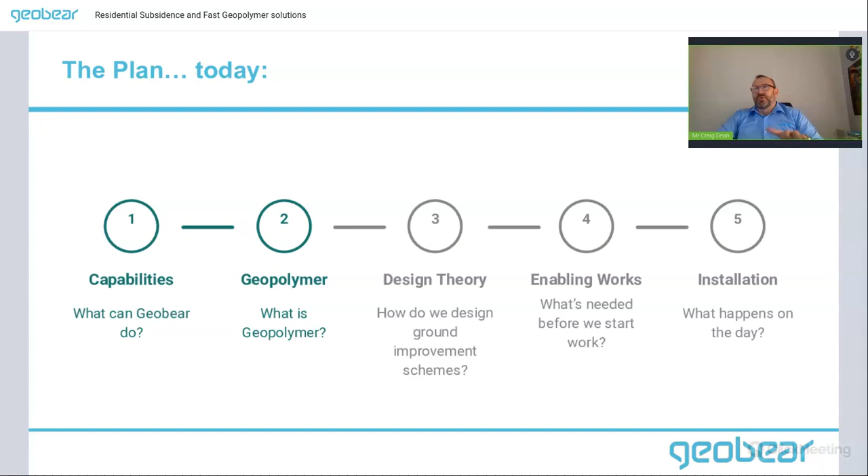So a little bit of understanding who GeoBear are. So we're a global leader in non-destructive solutions for foundation and infrastructure settlement, with a pattern of obviously subsidence problems. We're a global business established in 1983 in Finland, and I will go into a little bit more detail regarding that in a second. We were formerly known as Uretek up until December 2017.

So Uretek originated from a franchise model. Primarily, what we decided here at GeoBear in 2017 was to bring it back in-house. Primarily, that was to ensure level of service was acquired, and nonetheless, GeoBear was born in 2017. Since that was originally in the UK, we have primarily gone to other global areas, which again I'll go into in a second.

But we do have 3 depots and offices throughout the UK, and again I've talked about the importance of carbon footprint. But we operate from our offices and depots in Wolverhampton, Winchester, and Sandy. We're investing heavily in geographical locations moving forward to again offset and ensure our carbon footprint is achieved.

We operate with a full in-house engineering team. We also work with third-party consulting engineers. It depends on the detail of bespoke projects, and we're not going to hide that every project is individual, to understand and triage what the problem is, to then offset and ensure that we're finding the correct solution.

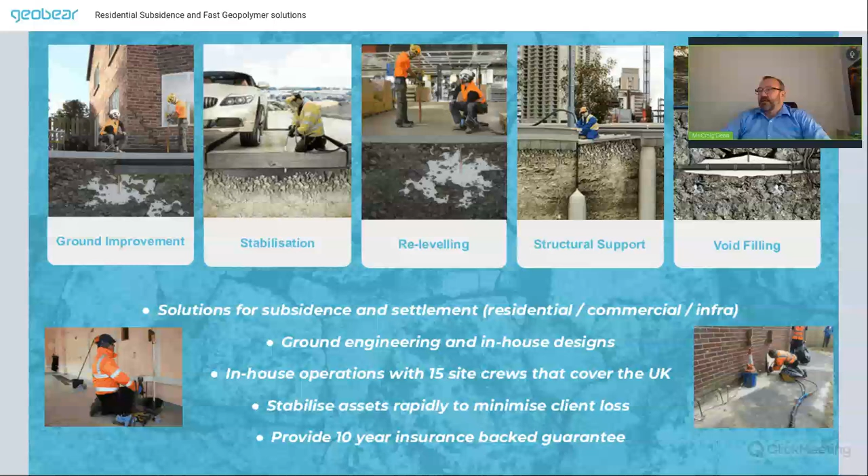So what I'd like to just quickly go over is the introduction of geopolymer materials. We have a volume of different geopolymers as market leader that react differently within different subsoils, from different techniques that we operate in, from ground stabilization to slab stabilization to ground improvement, and so on. Typically, our geopolymer is based on multi-component structural resin technology, which especially has been developed for ground engineering applications. Again, alternative ground improvements from piling to conventional underpinning.

So primarily the geopolymer is two components which hit each other and have a chemical reaction. It starts its early life as a liquid, and then very quickly it becomes a solid and solidifies with increased volume of dynamic energy, and it has an expansion force. I think it's important, and I will show you in a second a video where you'll see that it starts its life off as a liquid, starts to have a chemical reaction, and then the expansion force very quickly is clear. The chemical reaction is very quick, resulting in defined physical and mechanical characteristics.

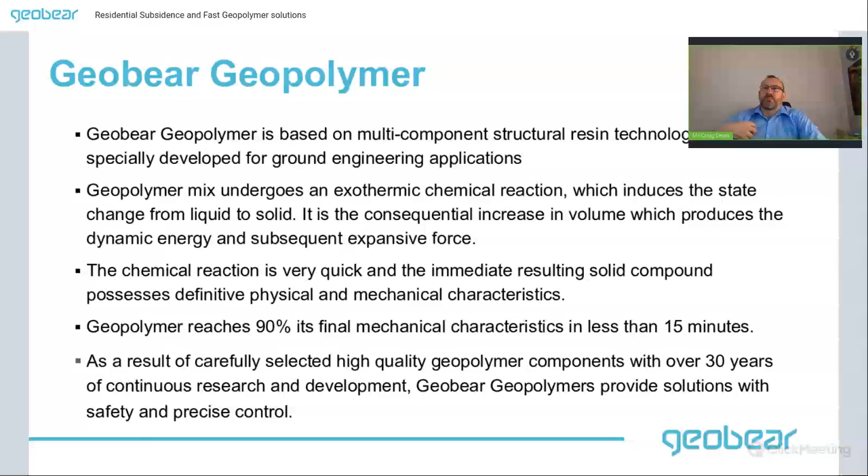The geopolymer reaches 90% of its final mechanical characteristics within less than 15 minutes. Once the geopolymer is entered into the ground, within 30 to 60 seconds, the reaction starts and primarily starts to expand. The carefully selected high-quality geopolymer components have over 30 years of research and development. And GeoBear continue to utilize our technology and provide a solution in safe environments with precise control. And I want to talk later on a little bit more of how that looks when we're actually treating a property.

So the specialist geopolymer ground injection expands 5 to 30 times its liquid state and volume. It strengthens weak soils and below structures. So there's no need for excavation. We start from ground level and inject below foundations, so to speak.

95% of the strength is achieved within 30 to 60 seconds from injection, and it is done in a controlled manner. We can lift foundations and slabs, multi-story properties, and I want to stress the importance that every single project is individual. It is a safer and greener process than alternatives. I'll go into our carbon footprint in a second, but primarily the two different components, automatically mixed on site, will then present an enhanced movement.

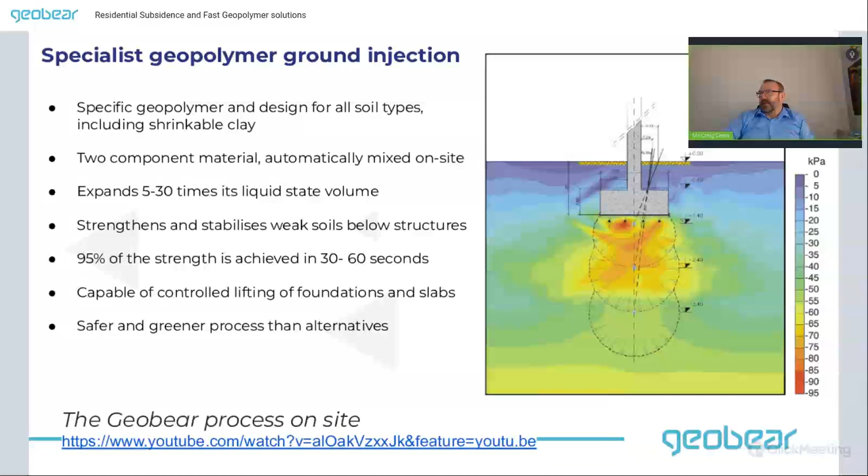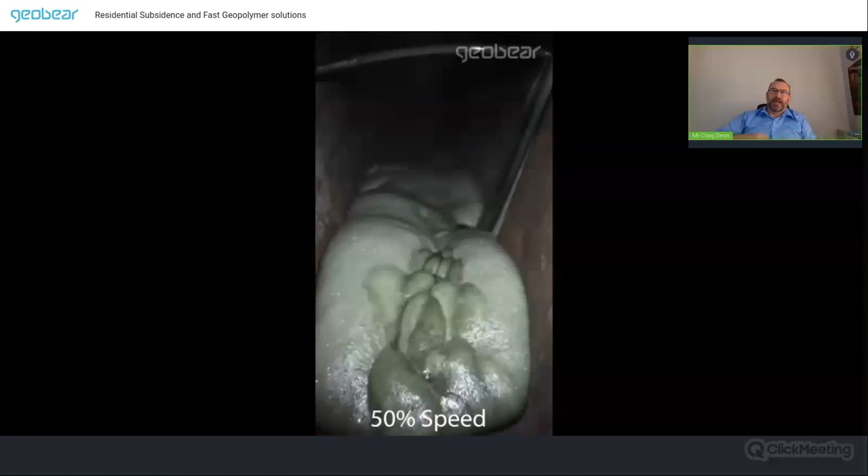So this is where I want to actually just show you, if I may, the process of how it starts its life. So Alistair, if you can just show the video, if you don't mind. So this is typically, it starts off as a liquid format. It very quickly has a chemical reaction, as you can see, and it starts to expand. Now, the differential within geopolymers and how our geopolymers work: we have significant different numbers of geopolymers, and they react differently within different subsoils. Thank you, Alistair, you can go back to the slide.

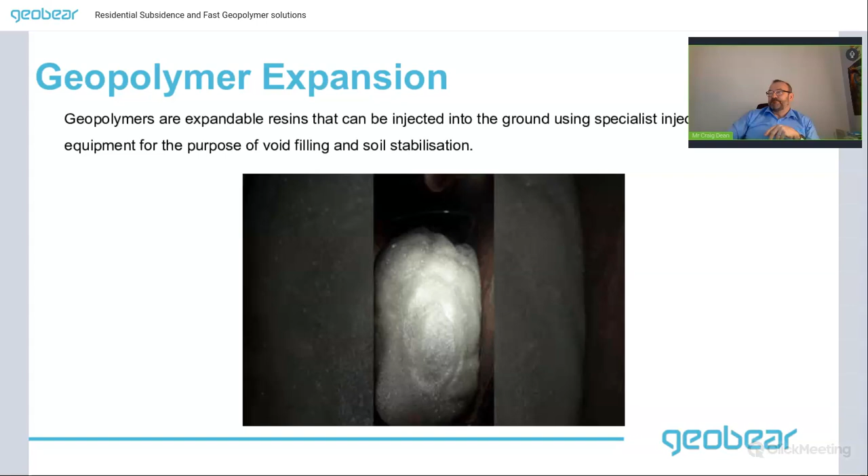Within that aspect, when we're going through our understanding of what is the main cause or the triage of subsidence, we will specifically, bespokely review the analytic data that we get to then present which geopolymer we want to have during treatment. And again, I'll touch on that slightly in a second.

The properties of the geopolymer: it's rapid hardening. It's 10 to 5 times lighter than your typical concrete or grout, respectively. Therefore, we're not adding more weight compression to the ground or the underside of foundations. It is a water-free solution, so geopolymers do not require water for their curing or hardening process. And as I've talked about the rapid hardening, within 15 minutes of injection it has cured and reached its hardened geopolymer property.

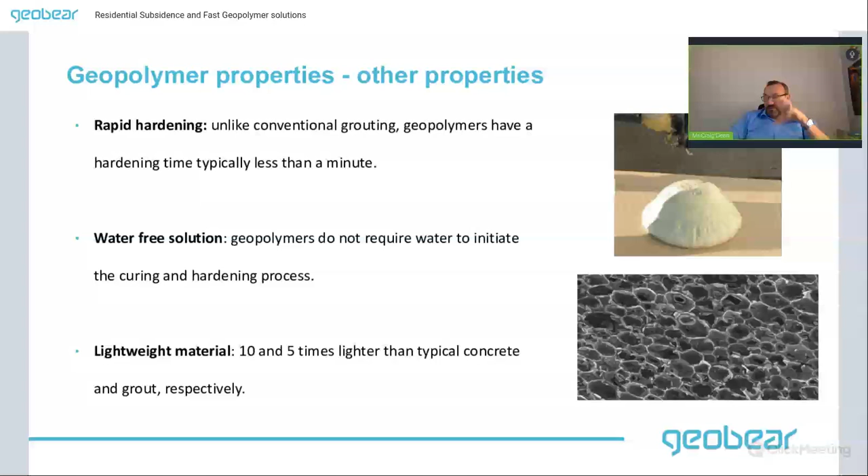What's very important to ourselves, and you've heard me talk about it throughout, is our carbon footprint. Carbon Footprint Limited undertook an independent assessment of our geopolymer injections, and it produces in the region of around 53 to 90% less carbon footprint compared to grouting or conventional mass concrete. Now, I can't be specific on the percentage because the geopolymers we have here at Geobear are different. So I'm trying to give you some form of scale, but 53 to 90%.

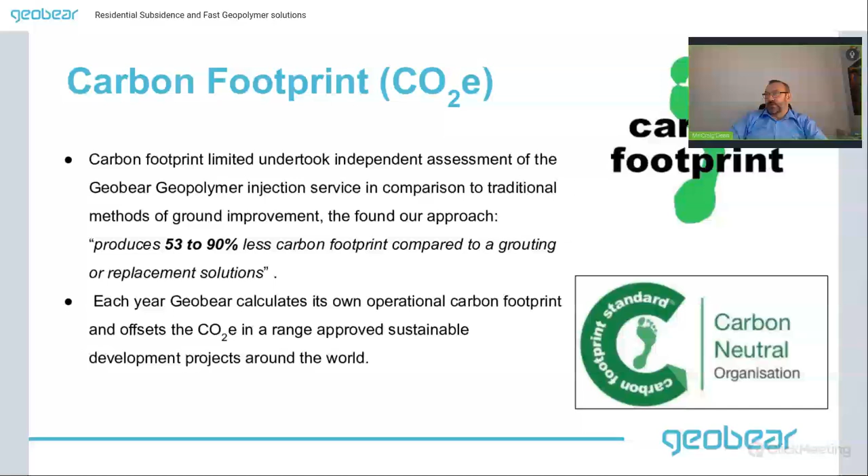Each year, Geobear calculates its own operational carbon footprint, and we offset that CO2 by way of approved sustainable development projects around the world. And we take great pride in that. And we are forever, like most reputable and good companies should be, looking at carbon footprint as a whole.

So, residential subsidence. I am going to go into detail of how our journey looks, but primarily what my guys who work for me are trained to look at are the signs of subsidence, working with multiple different organisations, from insurers to social housing companies to private residential clients. So we're looking at direction of cracks. We're looking for the categorization of cracks to follow a triage of solution. Door frames, windows that are sticking. We're looking also for settlement, historic movement, equally accelerated movement due to anything from drainage failure to anything that potentially is causing the root of subsidence.

During our site visits, we're looking not just at the specific area of concern. For example, a rear elevation outrigger is showing signs of movement, cracking. We're reviewing the whole property to understand what is required to give that level of expertise and service that we expect here at Geobear. Areas that we are looking for are separation, rotation of extensions, rippling within wallpaper, and level surveys are carried out to understand the scope of potential movement throughout the whole footprint of that property.

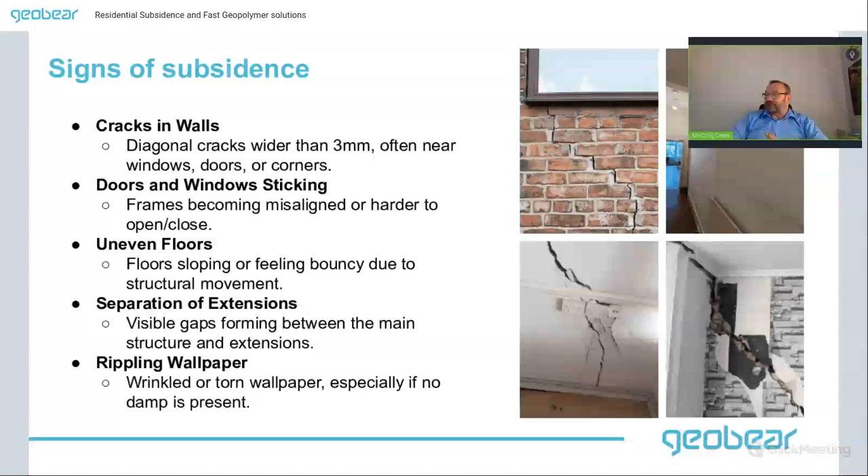Without boring you, what are the main causes of subsidence in the UK? Shrinkable clays. What we've seen in the last 7 years is what we call two surges, where we've had heat waves that have taken the moisture out of the subsoils and soils, and heave and shrinkable clays are becoming more and more prevalent within the UK. Tree root activity plays part of that as well, so nearby trees and vegetation extracting the moisture out of the ground. So during our site visits, we're looking not only at the footprint of the property, but the perimeter of the property, including understanding differentials within trees, from oaks to maples, to understand what we call low to high risk.

Water leaks in the UK. As we know, in the UK, a lot of properties were built in the early 1900s, 1930s, 1960s, and until a drain survey has been carried out, we're making an assumption that they will be potted drains that more than likely will have some form of defects. So we're very keen to equally understand location and condition of drainage. So water leaks is a prime example of what we deal with every day here at Geobear,

and what is causing the subsidence. Mining and historical excavations: again, bespokely, we'll review and underline the footprint of the property prior to the property being built. So again, we're looking at historic mappings to understand what potentially was there before the house was built, and then latterly construction work. So nearby digging, piling, disturbing soil stability, equally vibration, and so on and so forth. That is potentially the cause of subsidence.

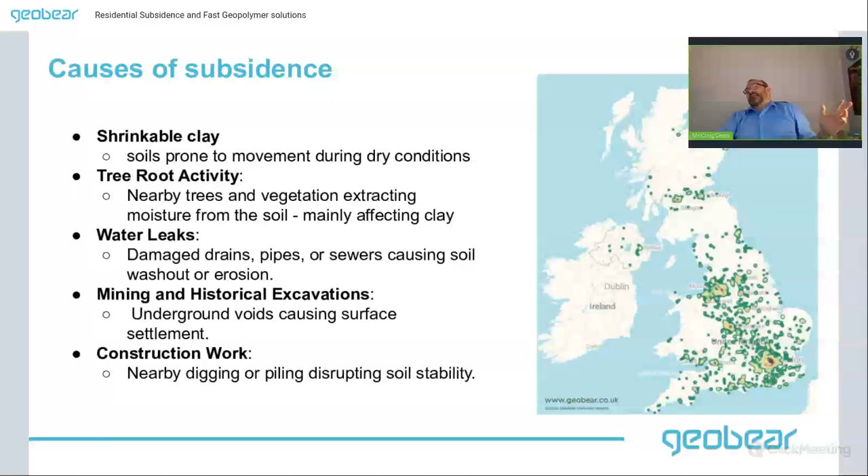So within that aspect, primarily, what is the difference between Geobear and conventional? We call that early intervention, and typical life cycle reduction is in the region of around 75%. From when a client comes to Geobear to when we do the initial site visit with, again, a dedicated area manager that will review what potentially is happening at the property, to then further investigation works from site investigation to drain survey to dynamic cone procedures, to then presenting with what we call the final stage quotation and proposal of

design with then treatment. So typically, conventional underpinning could take anything between 2 to 4 months, if not longer. The life cycle with Geobear is that we could be on site on the Monday and completed the works on the Tuesday. Therefore, 2 days in comparison to 3, 4, 5, or 6 months against comparative conventional underpinning techniques. Again, from when the initial project comes to us to when we present insurance-backed guarantees and certifications, we're looking at typically 15 weeks. That can be a lot quicker. We don't hide that. Again, we are a business that will review and work with all our clients.

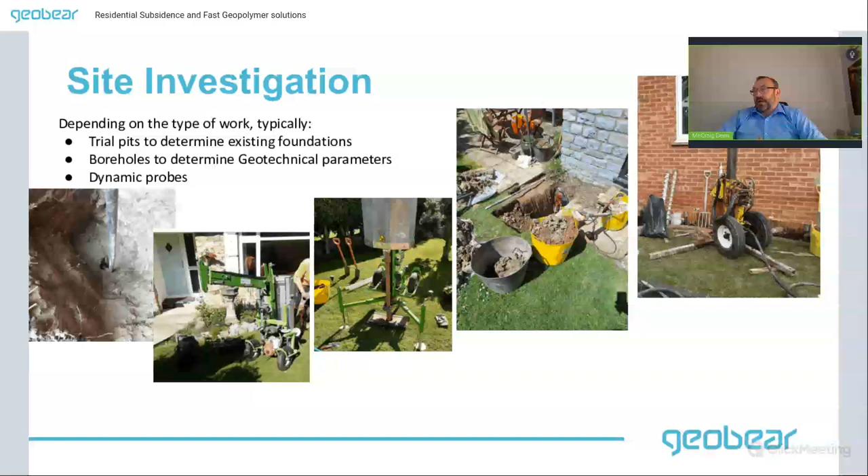At that stage we'll also go through and advise about drain surveys, and again, I'll touch on that in a second, but site investigation is so important and thorough for us to underline and ascertain, again, foundation depths, but the analytic understanding of what the makeup of those foundations are. Post site investigation, we will be able to understand the makeup of those foundations, the area of concern, and again, taking into consideration plasticity, water index, equally on that aspect as well, tree roots and other trees playing a part in it.

Understanding desiccation, so that's allowing us then to bespoke put a treatment together for a resolution, which is again governed by insurance-backed guarantees and such. We then present the client with an engineered treatment plan, and we call this a trio of expertise. So at this stage, the area manager is putting a design together for the solution to the underlying issue. That then is reviewed by our in-house engineering department, and at that stage, more information may be required.

But once approved, it will then go on to another area of expertise where we'll be checking the area manager's solution against the engineered solution, to again be ensuring that the correct triage and understanding of what we do is there.

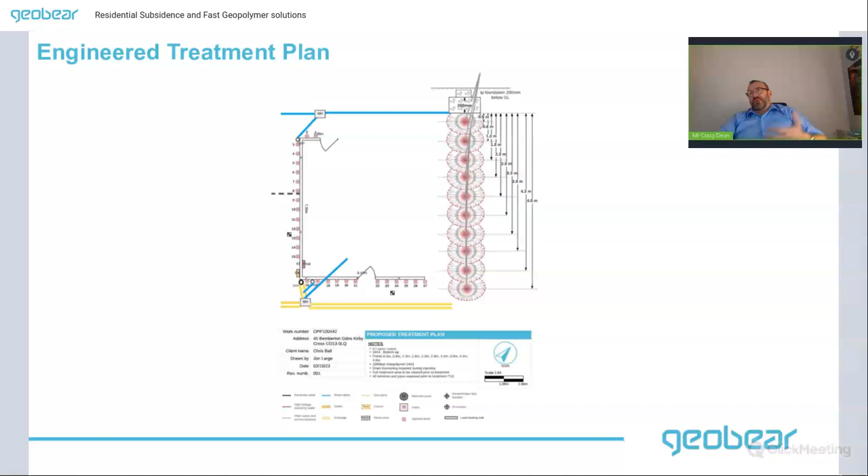At that stage, then primarily, we're now understanding that we're in a position to present the client with a quotation. But again, like I've talked about, it's the drain survey that is also very important, because understanding location and conditions of drainage is very important to us at Geobear, mainly because one thing that we don't hide behind is that we do not want our geopolymer to enter the drainage system. If it does, we have an isolated area of time to get the geopolymer out of the drainage system before it sets. One thing we do not want to be doing, as you can understand, is block people's drains.

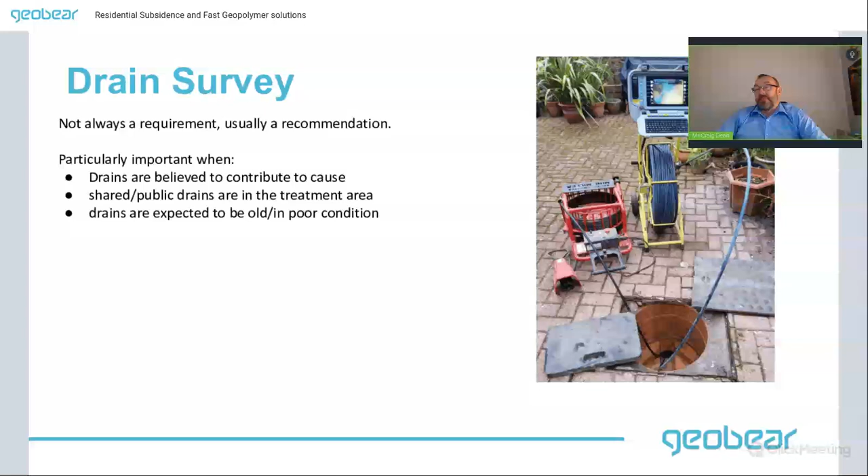At that stage, then, full triage has been completed and a solution is in place, and we go through a full client education process of our findings, from particularly what the problem was, the investigation works, so the triage underlining how we resolve that, to present them a personalised improvement recommendation, and therefore at that stage it is ready for Geobear to present its solution to the client. So again, moving on to the next steps.

As I've alluded to, we present significant reassurance, again the BBA accreditation, but we also present an insurance-backed guarantee. That's a 10-year insurance-backed guarantee that is underwritten by a third party, a 10-year company warranty, and lastly, a certificate of structural adequacy. The reassurances are there for the client, and equally the subsidence issue has been resolved.

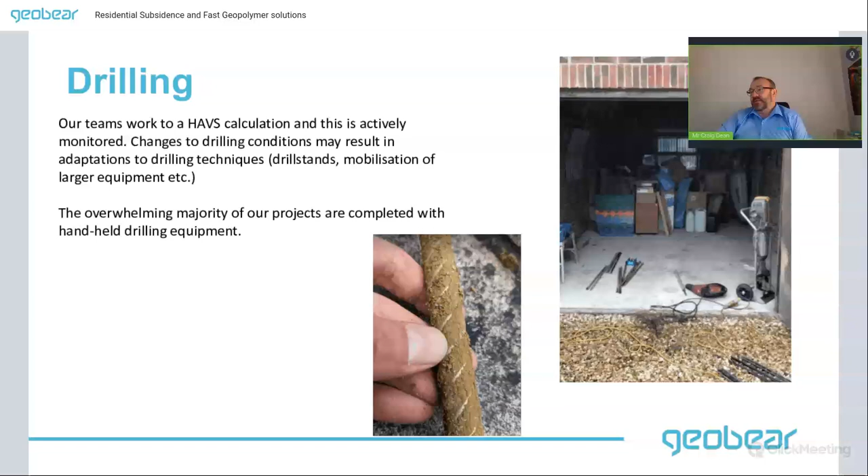So how do we deliver it? How in comparison to conventional underpinning do we come out on site and treat properties? Our drilling teams, our technicians work towards HAVS calculations, so safety is paramount. But primarily, what we are actually doing is treating the ground beneath foundations, and we do that by drilling first and foremost into the ground and to the underside of the foundation, and then erecting the steel into the ground, which then goes to the specific depths that we require. For a typical residential property, that can go down to 5 meters.

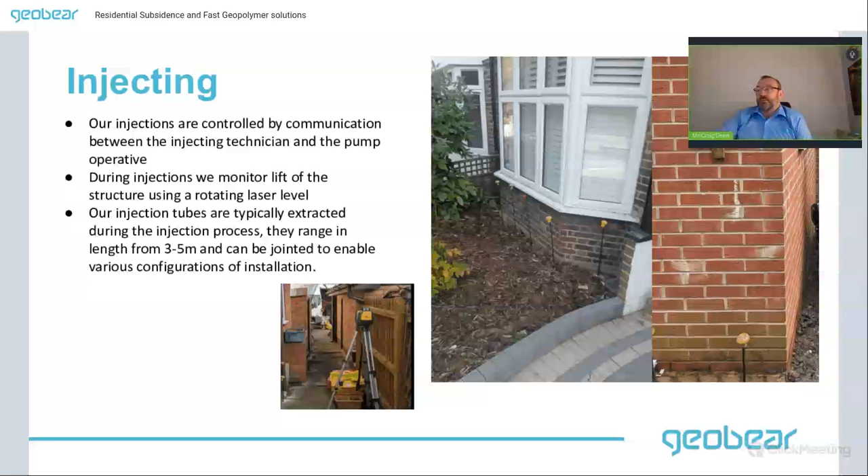But primarily at that stage, the steel that we're putting into the ground has no engineering impact on what we're doing, only to allow us to get our geopolymer to the underside of the foundation or to the depth of treatment that we require. During this process, it is controlled, and communication is ongoing through the teams, from the injection pump to the treatment area. And then during injections, we're monitoring lift or the movement of the structure using rotating laser levels. Our main objective is ground stabilization, but we are in a position to lift properties back to where potentially they were. But again, we are going for ground improvement to resolve the stabilization issue.

We do significant testing, specifically within granular soils, where we'll do pre and post DCPs, which show the improvement of the ground pre our treatment and post our treatment. And then obviously, it is reviewed via an engineer post-treatment. So a very unique way. And again, in comparison to conventional underpinning, as I've alluded to, we're normally on site for 1 to 2 days against 3 to 4 months.

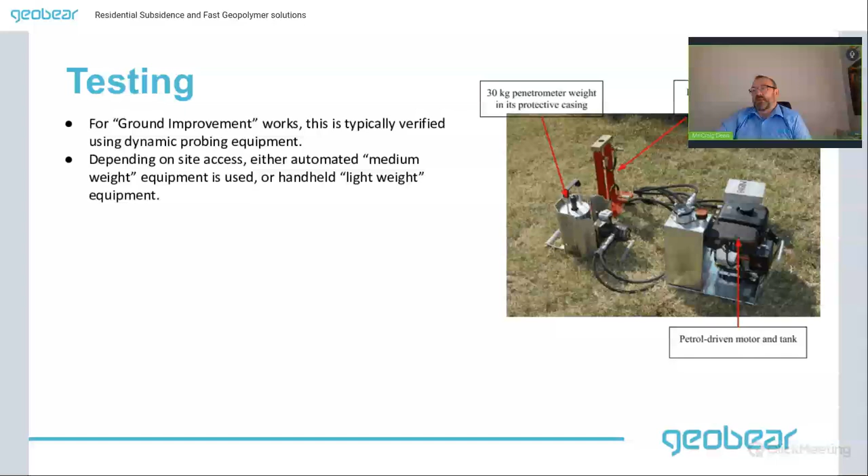So what I think is important is to give you a couple of case studies on different sectors that we've dealt with. We solved a problem in a London Borough. Geobear delivered a solution with a single team over a 1 week period. There was a block of flats with multiple tenants in the property. There were trees surrounding the block of flats. So again, from start of customer journey, triage, understanding, resolution, the sustainability benefits and the speed of delivery were a key part in the decision making of the council, because they had tenants that were living in the properties and they stayed in situ.

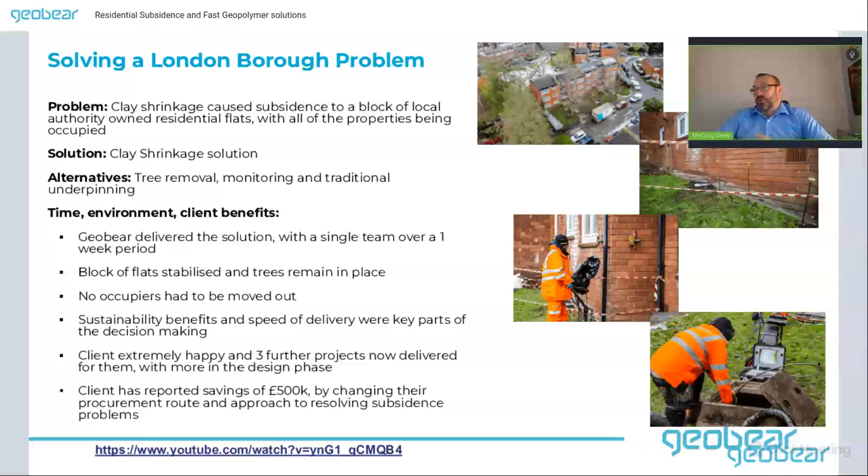The case study from the London Borough Council actually showed and reported savings in excess of £500,000, and changed their whole route of procurement. Again, safety is paramount, but nonetheless, clients were able to stay in the properties and go about their day-to-day activities as normal under our guidance of safety, obviously.

Another project was actually in Bristol. We had, again, a multiple occupancy property that was suffering with subsidence. The local authority gained approval to get a 100-year-old plus oak tree removed, which was at the side elevation. That unfortunately left other people having issues with the removal of the tree. So we were approached to see what we could do. Fortunately, the client had all the investigation work, and we mobilised very promptly. And it took us in the region of 3 days to inject.

The problematic thing with this particular project is you had a block of, again, flats with a driveway to the side elevation where the treatment was being undertaken. And at the rear elevation, you had all the parking. So access would have been a significant issue with conventional underpinning. And therefore, we worked around it, made it safe for an evening for cars to pass and park up at the rear.

It did have a lot of public eye interest. It was on the BBC news site. Equally, the mayor announced a win for all parties on Facebook. And like I said, the policyholder and the tenants that were in the properties stayed and were not affected by any access.

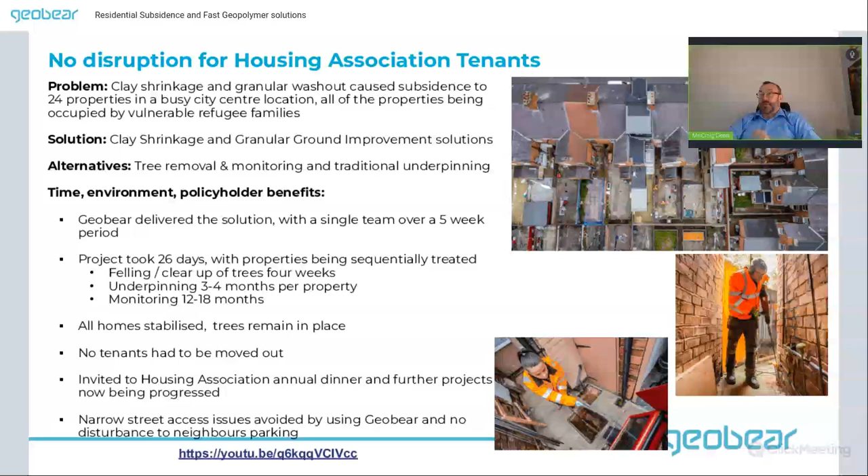But feedback from our clients is extremely important as well. Earlier I alluded to, we average between 15 and 25 projects per week delivered. So that goes through our Trustpilot. We equally work extremely hard on our NPS to understand, from promoters to passives to detractors. We pride ourselves on our overall service. We work with multiple different organisations and continue to not only sustain where Geobear are today, but our growth pattern is extremely aggressive. We don't hide that. We continue to be the best at what we do.